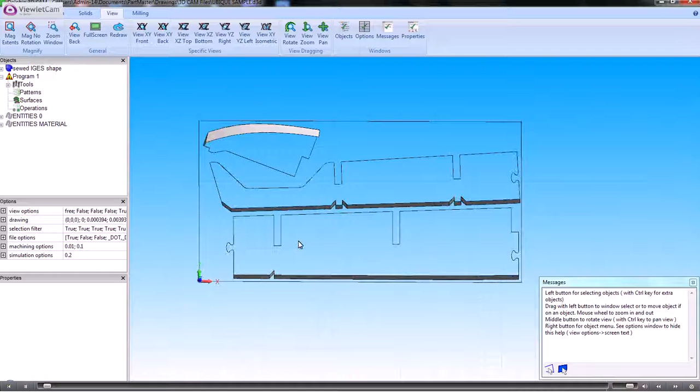Can machine these shapes. So I'm in 3D CAM at the moment, and this is the file that we've got, which is made up of an IGES shape, which is the 3D parts, and then some profiles which have been imported as DXF files. So the first thing is to sort out where we want zero.

So to do that, we go into milling, set the origin, and we'll make it Z max, so that Z0 is the top of the job. It can be wherever you want it to be, but I find it easier if it's the top of the job. So to machine the 2D shapes, if we highlight

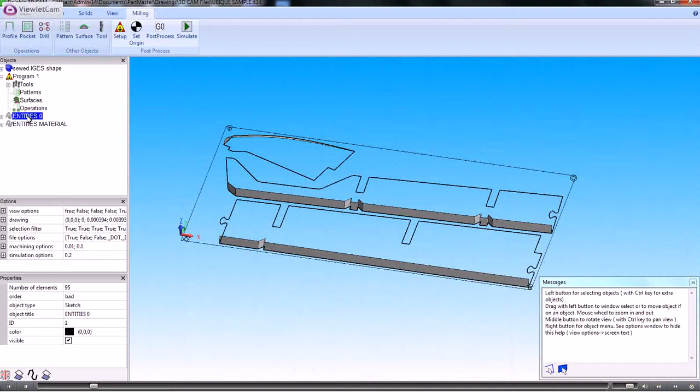the entities here in the objects window, we can see that those sketches have been highlighted as they've been imported as a single sketch. So we need to split those sketches. So if we right click and say split the sketch, then we get a sketch for each one of those shapes.

So if we want to do a 2D operation on this sketch here, we'll just have a quick look at the tools that we want to use. I'm not sure what tools we want to use, but it's quite a big part, so I'll use a big tool, but you can use whatever tool you want. Okay, so that's the sketch. We right click and say a new profile operation.

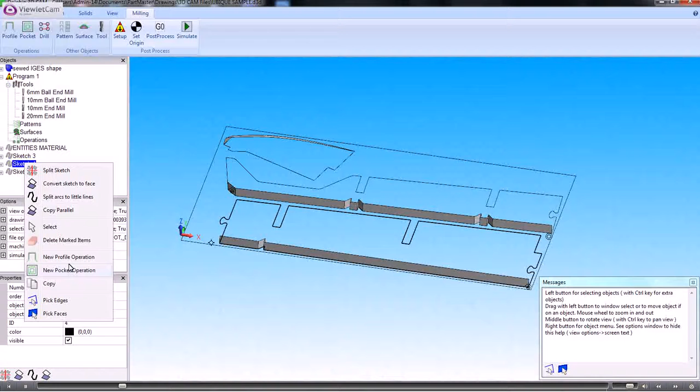We'll go around the outside. We can either climb or conventional mill. The roll radius will give us a lead on and a lead off. Offset extra I don't need, which will add on an allowance for finishing. So if you need to make multiple passes, you would do that, and then use this as a roughing and then a subsequent finishing pass.

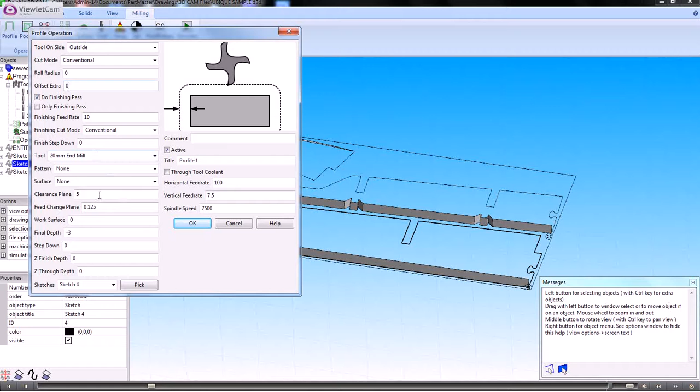The tool we want to use, I'll use a 20mm end mill, and then the clearance planes here. This is a position above the job where it's safe to rapid. The feed change plane is a position where it changes from rapid to feed rate. The final depth is the depth that you want to cut. If you want to do multiple step downs, then you just enter the value here. And if you need to go through the material, then you can add in a through depth there.

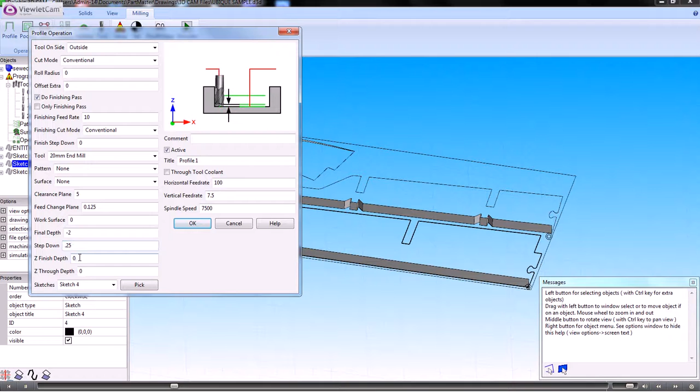Okay, so that's produced a straightforward 2D operation around the outside of that part, and then we can do the same thing on the other parts there.

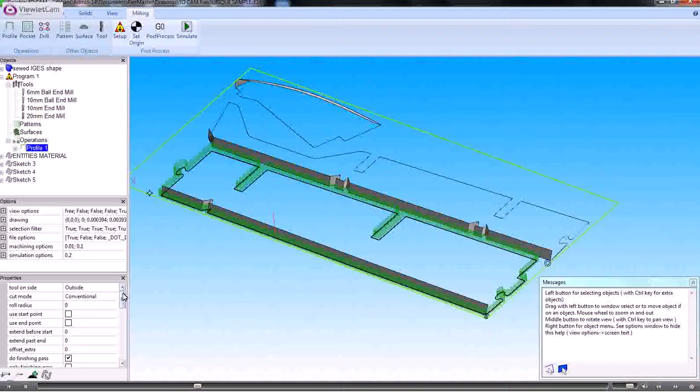What I'll go on to next is how we machine the angled face. So to start with, what I'll do is that profile operation, I'll just switch that off from the display so we can see more clearly what it is we're doing.

So I think the easiest way to do that is, let's change our view to XY, and what we'll do is I'll just, in freehand mode, draw a series of lines around that area there. I could easily read in the DXF file that generates this profile, but I'll show you how we do it in here. So I'm just going to do this in freehand mode.

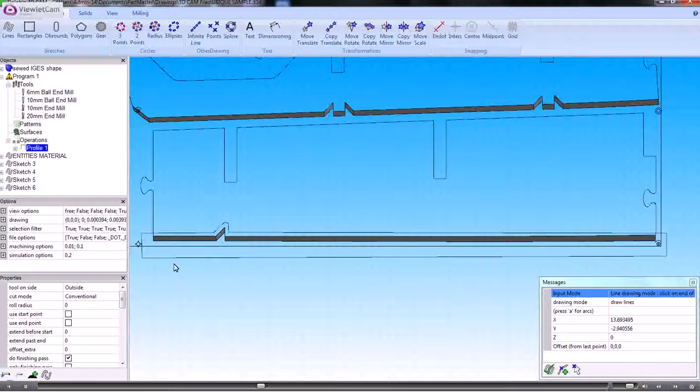If I want to, I can type in the exact coordinates of the endpoint here, but for a roughing operation, I'll use the snap mode to snap onto the end of there. So I've got a simple 2D sketch there, and I'll stop drawing. So I've now got a sketch which I can do a 3D operation on there.

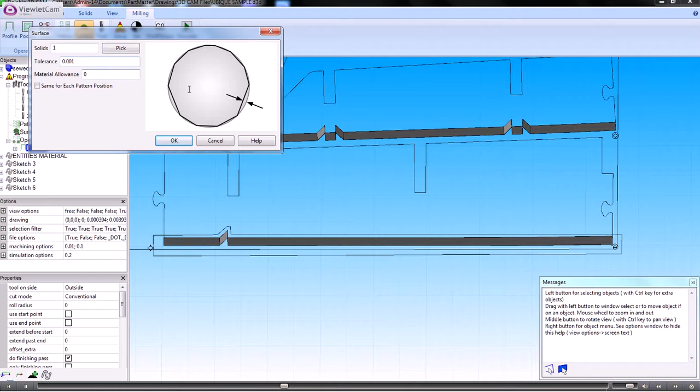So to do a 3D operation, I need to create a surface which is a triangulated mesh of the model. So I choose a surface, and the tolerance here just gives me a value for how coarse or how fine I want the part to be. So that's created the surface.

Now we'll do the toolpath on that. So that's the sketch there. So if we right click and say a new pocketing operation, I'll start off with a large step over so that it calculates more quickly. I'm going to use zigzag mode, and I'm going to change the angle to 90 degrees, so it's climbing up and down those faces.

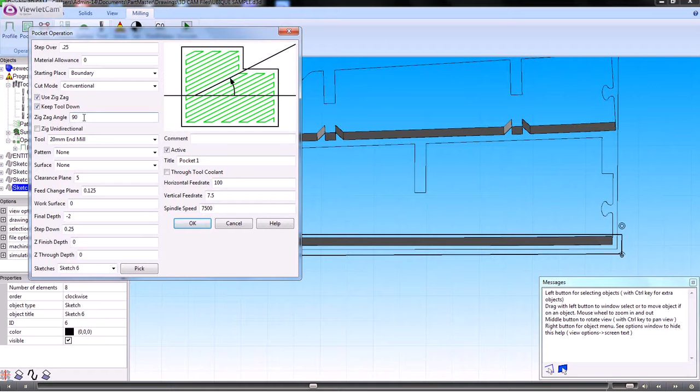Choose the tool I want to use, the clearance plane and the feed change plane and so on. The step down in this case will be 0, and I'll make the depth minus 2.5 so the edge of the ball nose cutter goes past the bottom. Okay, so that's in the wrong place.

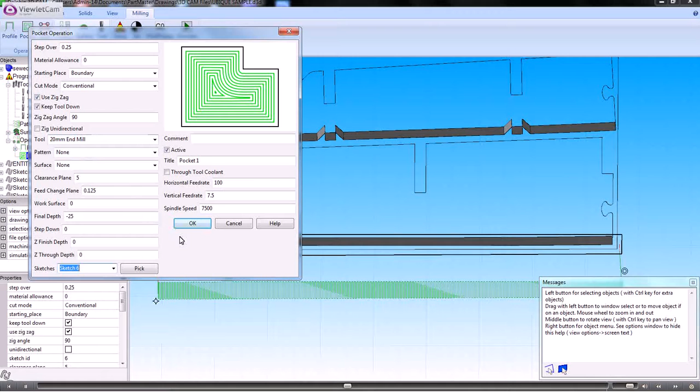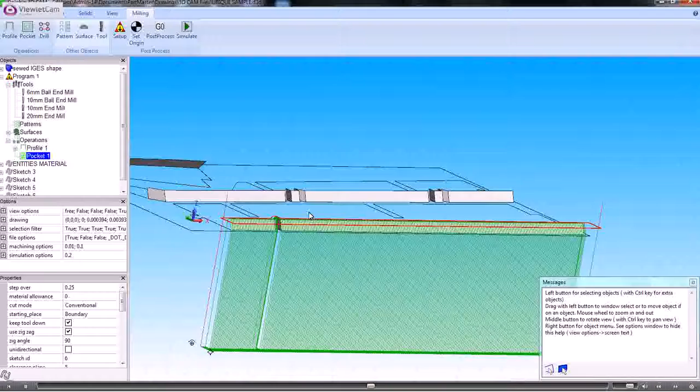Let's generate a surface with that. So that's just recalculating that toolpath now. Okay, so that's obviously going a wee bit too deep there, so we'll change that. Minus 2.5 I wanted, not 25. Okay.

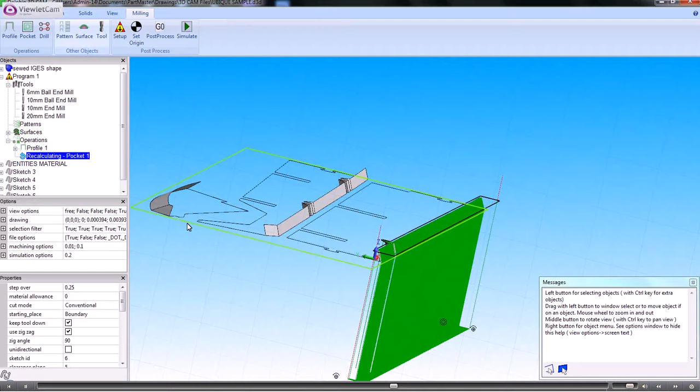Okay, so as we can see there, that has produced that toolpath running up and down the faces. I'm not sure how you're going to machine these re-entrants here. Maybe you need to use a very small cutter or a shaped tool and do some sort of broaching through it. It depends on the type of material it is and the sort of machine tool you're using.

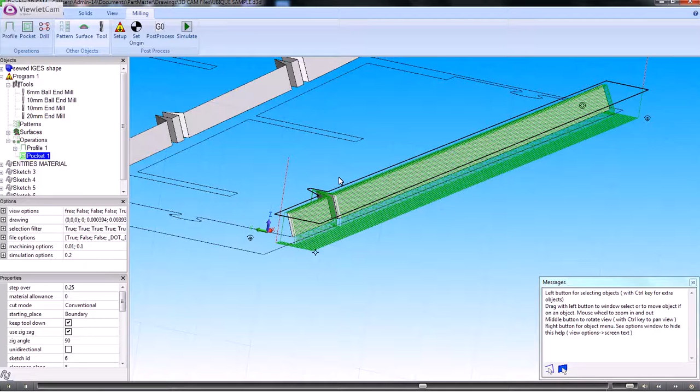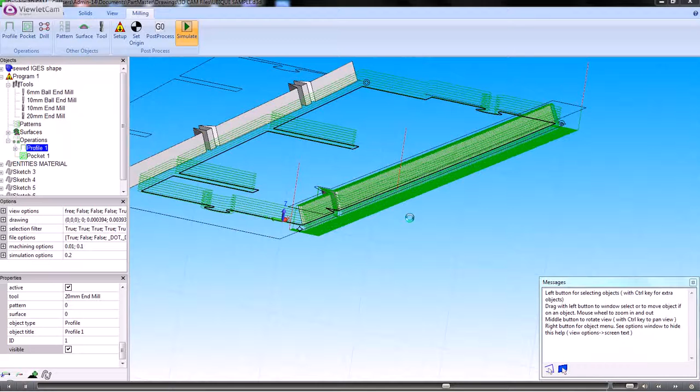Okay, so let's just switch on those two toolpaths there, and then we'll take that through into the simulator. Right, so that's loading the simulator. So if we wanted to, we can see just the stock material, the workpiece, or we can see the entire machine tool. But on this one, I guess we'll just see the stock material.

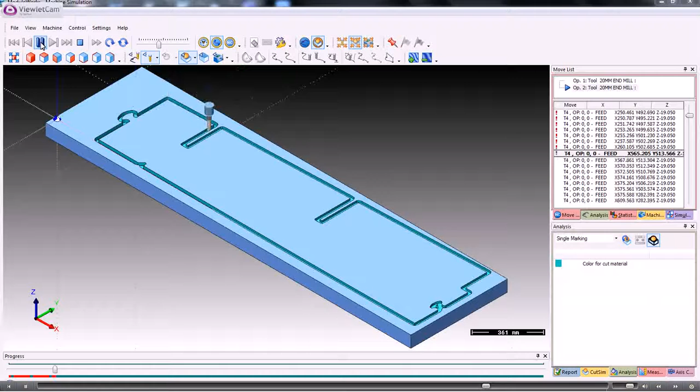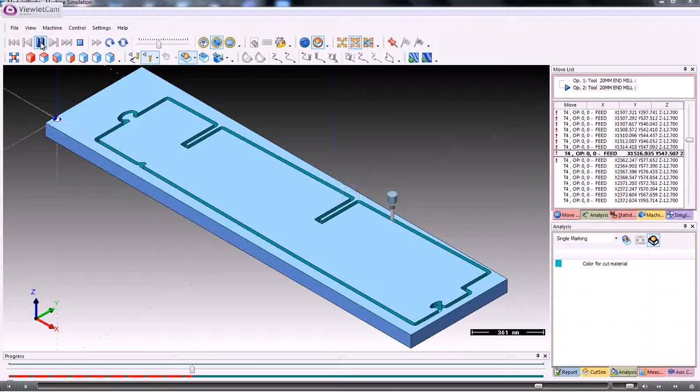And if we want to, we can just play this through. Okay, I'll just stop that. Another way of doing it, just to save some time, is just to simulate the entire job and fast forward to the end so that you see the results.

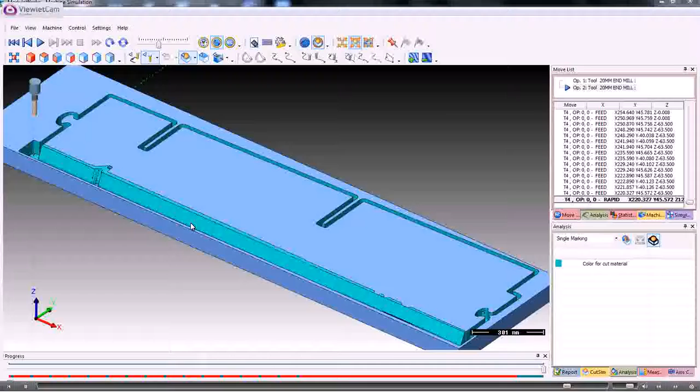So there we can see the 2D toolpath and the 3D toolpath. Now obviously the tolerance that I used on the roughing operation here, I would need to tighten that up to give a finishing pass. But that's achieved using the tool step over here, so that's 0.25, so we might obviously want to make that much smaller for a finishing cut.

If we didn't want to machine the face that has the angles on it as part of the 2D operation, then we could make up a separate sketch and just delete out those lines so that it's just an open contour for the outside shape. So we do exactly the same thing on these other shapes there, but that's the principle of how you read that file in and machine it.